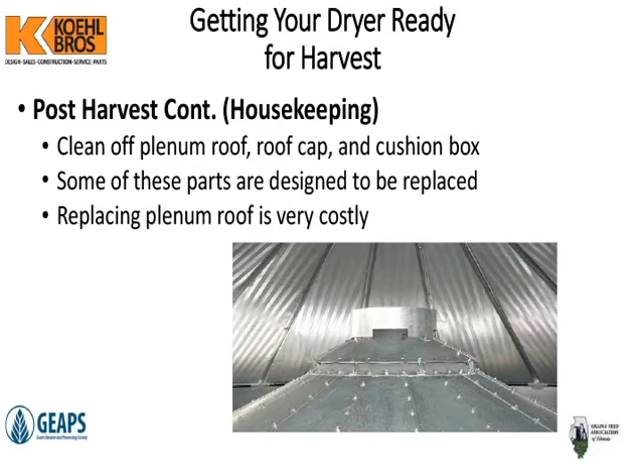Other items of cleaning, just basic housekeeping, right? The grain exchangers, they all have these clean outs on them. Some dryers have them on the inside. It's very important to get those clean. That's another not so fun one. You got to get a stick in there, a screwdriver, a punch or something and poke around. It can be time consuming. Nobody likes to do it, but it's very important.

Right here is our divider hopper. I'm sure anybody here who owns a tower dryer has been warned that is the most common place for a grain fire. Dust builds up right here. It's exactly the floor where the heating section and the cooling section separate. We get a lot of fines build up there, especially over the year. It gets harder. We go and fire that dryer up. It gets hot. It catches on fire because it's not going to meter. It's not going to continually move. It's just going to stay there and catch on fire.

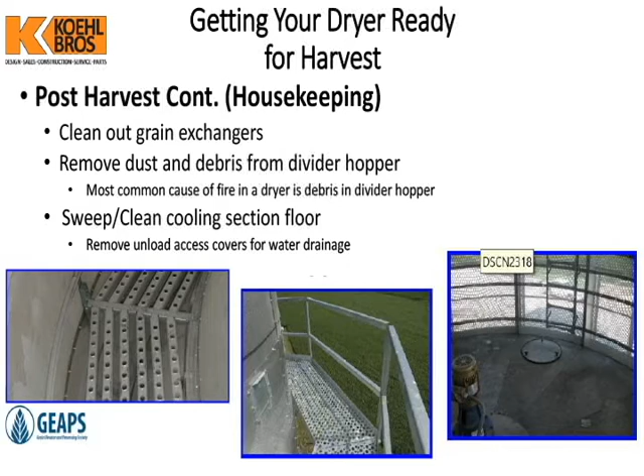Obviously, right here in the cooling section, throughout the year when there's not grain on it, we get water that comes in there. It sits on top of it. Again, that is a stainless steel floor or galvanized in some models, but it still will deteriorate. It still will rust. If you move these access covers, different models have them in different places, that'll allow that grain or the water, moisture, fines, whatever else to flow down into the unload floor where we can get it cleaned out.

The burner, we all have had to drill a burner at some time depending on what model dryer you've had. I know everybody knows it's a pain in the butt. We hire seasonal guys to do it. It's the least favorite thing my guys do. So what we can do there at the end of the year, let's make sure we get it just 100% clean. All of the fines, all the debris you can. I know when you're emptying the dryer, you get more fines, right? So you clean it off. I know throughout the year as more stuff falls through, maybe a distributor's leaking into the dryer a little bit, it's going to fill up again. That's where we're going to tarp it, keep it clean.

And then a lot of guys will spray their manifold cleaner. I've heard a guy say that he used Pam and it works great. I don't know, maybe your wife might get mad if you take Pam out of the house to take to the elevator, but that's what I've been told.

These holes on the older dryers are 5/64. We're going to talk a little bit about maintaining those burners here in a bit, but if you have a newer dryer, it's going to be aluminum alloy. You probably won't have to drill it. The older dryers, a 5/64, real long 6-inch bit will get it clean for you. That's again something you can do. If you got just a few holes at the end of harvest, maybe drill them out and then spray them down and cover the burner up.

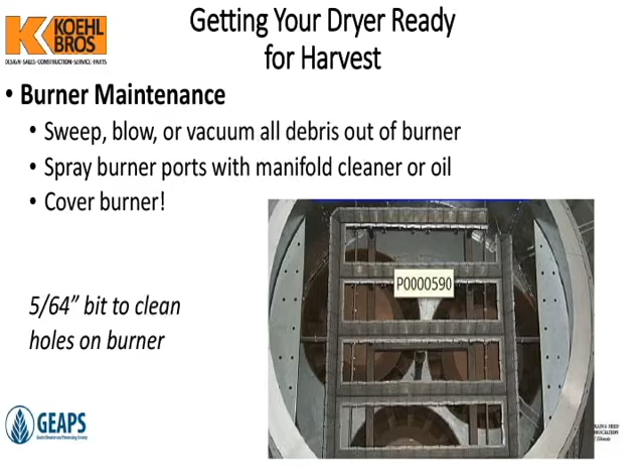After harvest, again, a few final things. We want to make sure, like I was saying, get all the water out. Water is the number one element that's going to kill your tower dryer. If it's not a fire, I actually think water is probably worse for it. So on the Zimmerman dryers or any Sukups or the flat bottom sweeps, the Brocks are similar too, we're going to have some clean outs on the bottom of the dryer. These ones are not for a fire. It's not so you can pull it if you have a column catch or a column get plugged. It's strictly to let the water out. That's why we have them there. That's what the manufacturer wants you to do. We want to keep the water off there.

If you have an older style hopper bottom or a Barrico or something of that nature, we want to pull that discharge out. A lot of guys, I've seen them put a plug on the back end, the tail end of a conveyor. Anything you can do to allow that moisture to go out. I've heard horror stories of guys firing up in the middle of winter. They said they ran the metering drum, it was fine. They ran the unload conveyor, and then they snapped the chain in half, right? Because there's 4 inches of water down in the base of the conveyor. It'll happen. It'll rip it all apart.

Final thing, gas train right here. There's a ball valve on there for a reason. It's probably not big enough. It'd be worth your while in the winter time, maybe every once in a while, poke a piece of welding rod or something of that nature up there. Make sure that water's coming down. The other item, which I don't think you can see here, but you got a 3/8 copper tube that goes up to the burner as well. It's a pilot. Doesn't matter how good you have the burner covered, you're still going to get a little bit of moisture in there, whether it's condensation, etc. That's going to be able to come down into the gas train.

If it does get in your gas train, there's a little CV valve right here. We'll discuss that a little later on too, but you can have some real operational issues. If we get water in there and it freezes, we'll make a little ice. You'll tell me your dryer's not coming up to heat. I'll tell you that you broke your CV valve. You say I'm wrong, you had the drain open all year. Then we'll finally take it apart. There'll be a big ice, and a day's worth of downtime later, we'll put a new one on and go from there.

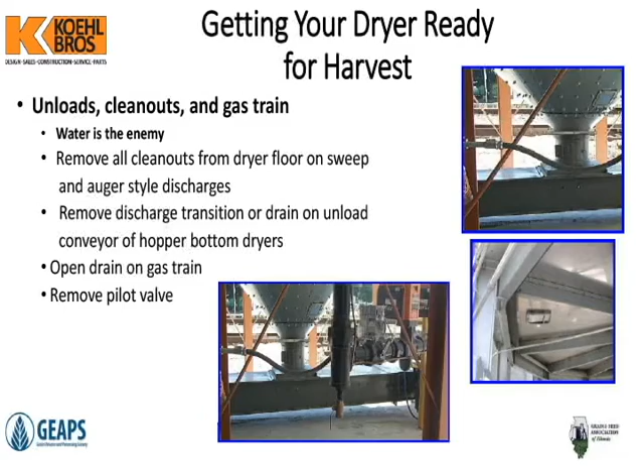So a recap on the end of season, right? We want to clean the plenum roof, make sure our grain exchangers are cleaned out, check the divider hopper just so no one at the beginning of next year fires it up without cleaning it, get our burner cleaned, covered, sprayed, and then make sure the cooling floor and the unload floor are ready. Make sure water can get out of there.

Okay, moving on to preventive maintenance. In tower dryers, it's really common, right? We all call it a pre-season. Everybody's got their pre-season guy. There's companies that do nothing but pre-seasons all year long. There's guys that go state to state and follow the harvest. They do pre-seasons. The main idea of a pre-season is to pinpoint any problems you're going to have, try to avoid downtime, do preventive maintenance like greasing, etc. Make sure the dryer is safe and operational, ready for harvest.

During this, we got a few things, right? There's big checklists. The manufacturer, when you get a GSI dryer, a Zimmerman dryer, a Sukup dryer, they'll have preventive maintenance items. You can go down, hit the checklist. A few things they're going to have you do: lubricate everything, check and fill all the gear cases, make sure the pipe train's in good working order, clean out the control panel, make sure your belts and motor sheaves are all good, make sure the blowers start up, everything lights up. This is just something a service tech is going to do to make sure you guys are ready to go as soon as the trucks start rolling in. I'll get into all this in more detail in a minute.

Okay, our unloads and our metering. So there's several different kinds of unload devices just within the same model of dryers over vintages. Right here we've got the Zimmerman sweep. Sukup is very similar to that as well. It's a flat bottom dryer. It's going to go along with the UHMW paddles and knock the corn out. This is a metering drum on a GSI dryer. It's a hopper bottom. Again, just meters the corn out, it's a big cone.

So starting on the old Zimmerman dryers, which I don't have a picture of, if you have augers as your unloads, that's very common in Illinois. They sold a ton of them, being out of Litchfield at the beginning. You've got a gearbox on the outside of your dryer, you've got a gearbox on the inside of your dryer, then you've got another two-piece gearbox with the augers attached to it.

You want to make sure all those are full on oil. They've got vents. You want to make sure the vents are clean. Make sure all the oil's up to the check plugs. On the hopper bottoms here, there's a couple different varieties of these gearboxes. It's called a Sumitomo. Some of them are grease-filled, some of them are oil-filled.

If you've got issues with them leaking, more than likely somebody at some time drained them, put a grease zerk on them, and they filled them all the way up. You just want to make sure there's something in there. They're very slow revolutions, so they don't need oil necessarily. They could be grease-filled.

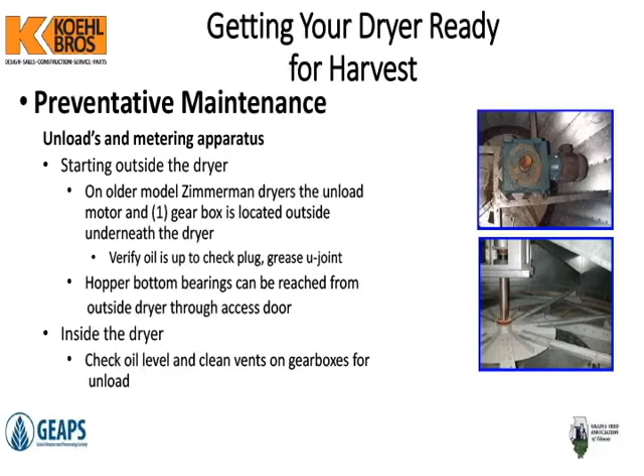Moving on to our blowers and our belts. So when we're greasing, we always get the question, right, do we grease our motors? That's a hit or miss topic right there. If you've never greased your motor before and you've got a dryer that's been around for 25 years with a 100 horsepower motor on it, you've never greased it, I wouldn't start now, right? You're going to pump grease into the windings, because the seals are worn or dried out. Wouldn't start now.

Manufacturer specification on the newer dryers say that they want 1 pump per 10 horsepower. Some of the blower motors do have a relief plug where you could take out the relief plug, pump grease until you see it, run the motor a little bit, check it again.

On the blowers on a tower dryer, they typically have a blower, not an axial fan, which means it's got its own separate set of bearings just for the blower. There's top and bottom. The bottom bearing, you guys are going to want to fill that up until you see grease relieve from the seal or somewhere of that nature, spinning the belts as you go, and then count your pumps. When you get to 50, depending on if the dryer's greased every year, depending on how many hours you run, that's typically around the numbers we're seeing. Hit your top zerk and do the exact same amount.

You want to check your blower belts. The belts should be even from sheave to blower. Make sure those are all even. Make sure the belts are tensioned. Manufacturer specification on the belts is you should be able to push them in 1 finger's width per belt, or not push it past the belt. You got to be careful on tower dryer blower belts and blowers. They use a V-groove belt, which is actually a little too robust for this application if you ask me.

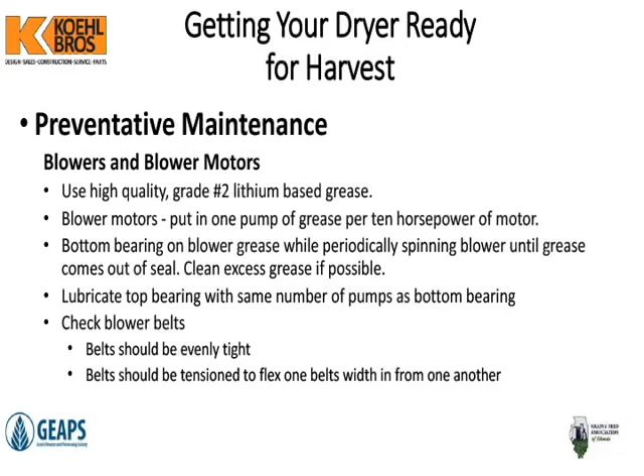Pipe train inspection, we talked a little bit about that. You want to look at your Maxon valves, CV valves, and ball valves. Make sure they're all moving freely. If there's rust and corrosion in there, you're going to feel resistance. You shouldn't have anything on the CV valves, the ball valves, or your Maxons. Maxon valves are, again, really, really expensive. They're made of cast. They will not give. If you get water in them and they freeze, they just crack. They explode. They will not stretch.

So that's something you want to check before harvest. Maxon valves are expensive due to that. Not everybody carries them. We do stock a few. I know GSI has some. I know you can get them places, but they come few and far between during harvest. So that's something you want to make sure is in order before you get going.

Make sure all your gauges are working on the dryers. If your gauges aren't working and you call and try to get somebody to troubleshoot you over the phone, the very first thing they're going to ask is what's the incoming pressure. If you can't tell them that, then they're not going to be able to help you out a whole lot.

There's drains and vents. There's vents on your regulator, there's vents on the pilot solenoid. You want to make sure those are clean. If there was construction going on at your site, another dryer was added, if there was construction going on down the road, you want to make sure those vents have been cleaned out. You want to make sure there's not a bunch of debris in your gas train. It can also cause you headaches and capacity issues down the road.

Control panels. There's companies around that will come and put an infrared camera on your control panel. You can do that. We've done it on a few facilities and found some pretty significant issues with old starters, one leg being hotter than the other. But the biggest way you can avoid that is just make sure all the connections are tight, make sure your starter's in good working order, make sure the heater is working.

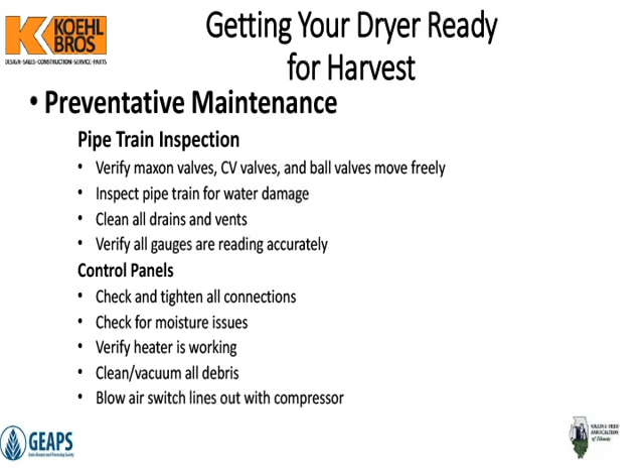We talked a little bit about the burner earlier, but I'm going to double back on that. Like I said, the old dryers had a 5/64 bit. It's about a 6-inch long bit. They're special. You can get them at Fastenal. You're not going to find it at your regular hardware store, though. When you're drilling those burners out, you want to make sure you're going all the way through. If you get a 1/2 inch in and it stops, it's probably an old bit in there. There's maybe some rust or corrosion. You're going to have to go all the way in, a couple inches in.

The new burners are aluminum alloy. Thank God Maxon started doing that so that we're not all sitting up there for a day or two drilling burners out. Those can still get clogged. The way a tower dryer works is it's high volume, low pressure. We can operate a tower dryer with as little as 8 pounds. A normal air compressor, when you're just blowing it out, you're blowing about 15 or 20. So it's not going to blow those holes clean.

Even on the aluminum alloy, if you get dust and debris in there, it's not going to blow them out. You're going to have to get up there with a big air compressor, poke them out with a T-handle or something like that, and get the holes clean. If you don't, and your dryer's coming up to temperature really slowly, that could be a pretty good indicator that you've got a burner that's clogged.

While you're up there, make sure your flame rod is not grounded. You can have all sorts of communication issues and interference if the spark plug or the flame rod are touching the side of the burner can instead of the porcelain touching it. And make sure the connections are good on there, and make sure that your spark plug wire and your flame rod wire are not touching each other, because you'll get interference that way as well.

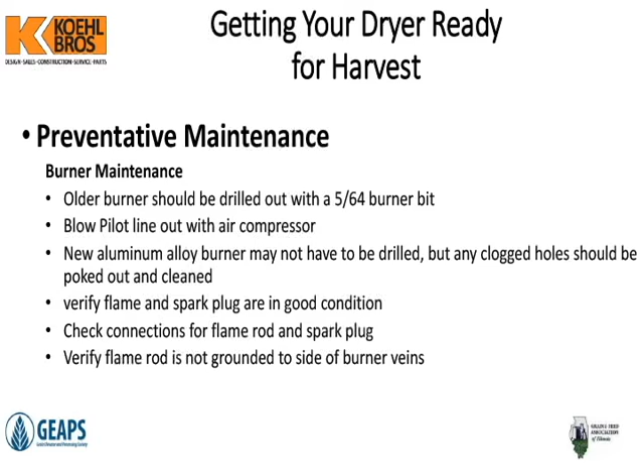Along with the preseason, typically you'll get a report. This is a report that we've done, actually on a tower dryer not too far down the road from here. We just identify a few issues, right? This close to harvest, we can't replace everything. We got patch sheets, unload motors, older. These are controls issues that we're not going to be able to take care of right now. That's why it's so important to follow up with the service provider or get these repairs on your list to take care of directly after harvest, just because there's only so much time.

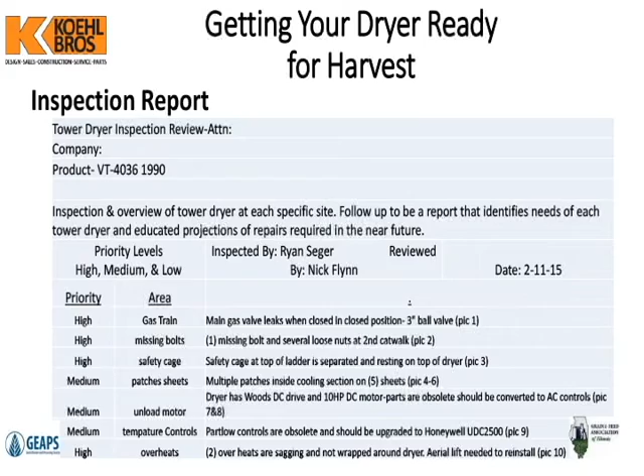Here in the report, follow up with some pictures. This is an old DC motor on a dryer that's around this area. If that dryer goes down in the middle of harvest, that DC motor, those parts are obsolete. They're looking at a 2-day conversion to get that changed out. It's time consuming. You can't afford to be down for 2 days, and I can't afford to get 2 service techs out there. So something to keep in mind.

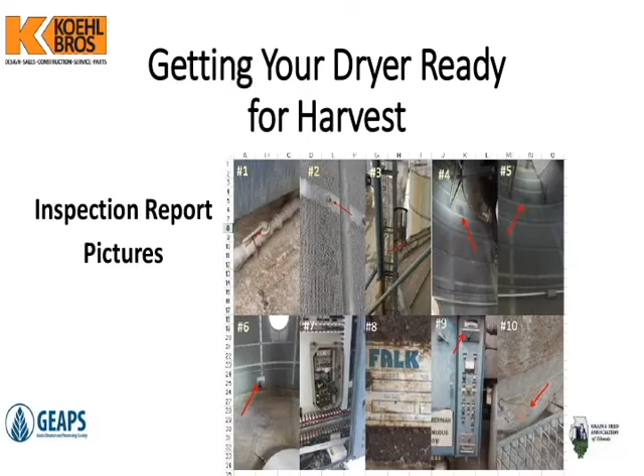Rounding back up, safety and success during harvest. Obviously, when you guys are getting in and out of the dryer, I know it's hectic during harvest. You want to make sure you're locking things out, tagging things out. You don't want the new guy there, your seasonal help, turning on the unload conveyor because another truck came in. He's going to fire up the dryer. You're in there cleaning it out. It can be very dangerous. Obviously, be very careful during harvest. I know things can get pushed back.

Inspect ladders and catwalks prior to harvest. During harvest, you don't want to be worrying about the ladder falling apart as you're running up there in the middle of the night to check out an overheat or something like that. So again, that's something to keep an eye on. Make the replacements you need to and the repairs in the off season.

Be careful entering and exiting the burner. Still to this day, anybody who's ever worked on a tower dryer knows that getting on and off the burner is not a fun thing. There are some alternatives now. There's a couple companies that have fall prevention systems that can be mounted over the burner. They're expensive, but they're a good thing because, like I said, it's very uncomfortable climbing over that.

I'm going to move on to a little bit more about what Bob was talking about, efficiency of drying and why this is important, right? This happens to be part of the preseason as you bring in your seasonal help, as you guys are looking at how you're going to run, looking at the types of grain coming in this year. There's a few things we want to look at. Housekeeping, we're going to look at training our operators and watchdog systems and capacity checks.

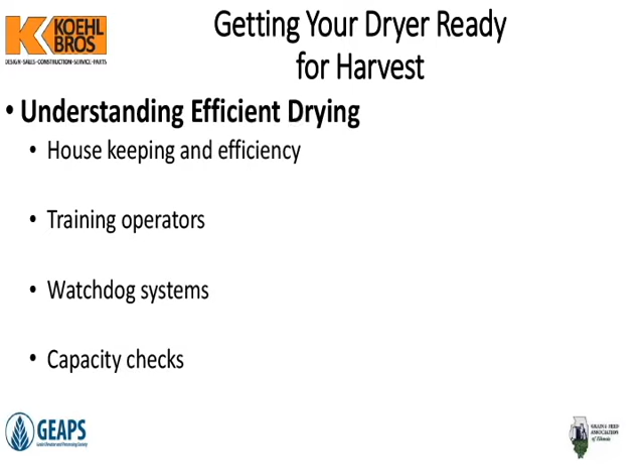Housekeeping and efficiency. I hear all the time when I show up and somebody's telling me we're not making capacity, the dryer's not doing what it's supposed to, and I say, well, the thing's covered in red dog from the outside, you can't clean it. They say, well, we can't afford to shut down. The office told us we can't shut down. Well, my answer to that is you can't afford not to.

Some models of dryers come with a static pressure gauge. It's a Magnehelic system. We've installed these aftermarket on a few tower dryers around the area. They seem to be, Darren and Matt can tell us, they're good. They give you some good information. What it allows us to see is whether the dryer is basically working too hard or not.

Again, most tower dryers have got a blower in there. The way those blowers work is they can only shove out as much air as they can suck in, or they can only suck in as much air as they can push out. If your dryer's covered with dust on the inside, the outside, however it is, and it can't breathe, those blowers are going to run slower and slower. They're not going to fight, they're not going to shove it out. They're just going to sit there and run slower and slower. You're going to waste electricity, waste time, and the dryer's not going to make capacity.

A static pressure gauge can be added aftermarket to tell you when you've hit the threshold of it's time to stop, shut down, clean it out, take an hour, and get back up and running. They're perforated for a reason. The air needs to go across the grain, especially in the heat section, but as well as in the cool section. If you're right by a truck dump, you need to keep an eye on it, right?

If we're not getting that grain cooled down, we're going to have issues with quality. If we're not cooling it down in a slow manner and we're throwing it in the bin still hot, or we're leaving it out, putting it in a pile hot, we're going to have stress cracking, etc. It's very important that that dryer is clean.

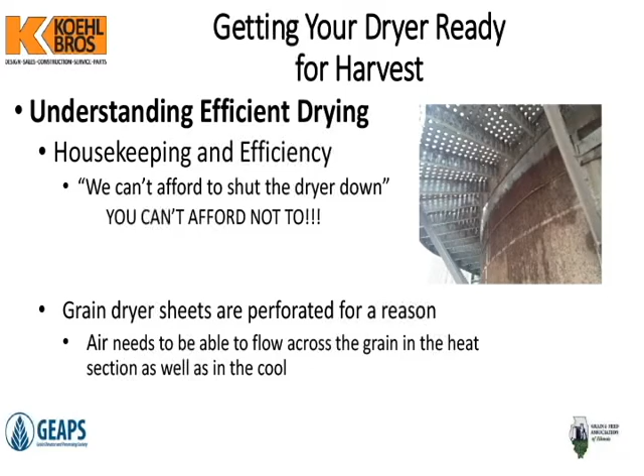Training our operators. I know everybody here has a guy in their neighborhood, especially in the country elevators, who just comes and dries for us every night during harvest. That's what he's done for the last 20 years. He says he's got it, he knows the dryer. Well, he may not understand the grain, right? We need to talk about every aspect of that dryer with this guy. We talk about the importance of running the dryer efficiently, cost effectiveness, etc.

A few things we don't talk about very often. I've got brand new dryers that we put out. I've got dryers that have been out for 30 years. Everybody tells me the same thing: we never mess with the louvers, we don't know what they're for. So we're going to get into that too. We need to keep the dryer full of grain, and we need to make sure our operators understand that we have the unload speed set correctly. Whoops, I guess not. Maybe I just need to talk about it.

Louvers. I don't know if I've got this later on my PowerPoint or not, but the louvers for the Sukup dryers, the Brock dryers, the Zimmermans, and the GSI dryers: 5 points or less of moisture is what the dryer is rated for. If you're taking anything 5 points or less, we want the louvers closed. What that's going to do is allow us to suck more air across the grain down in the cooling section. It will cool it down better. We'll have better quality grain.

If you're trying to do any more than 5 points of moisture, which I know in this area we do all year long, we want to open those louvers up. What that's going to do is make the actual grain a little hotter. It's going to be able to suck more air in through the windows, get it up to the heat section. It's not going to pull as much air across the dryer sheets down in the cooling section and cool our grain, so we're going to have hotter grain coming out.

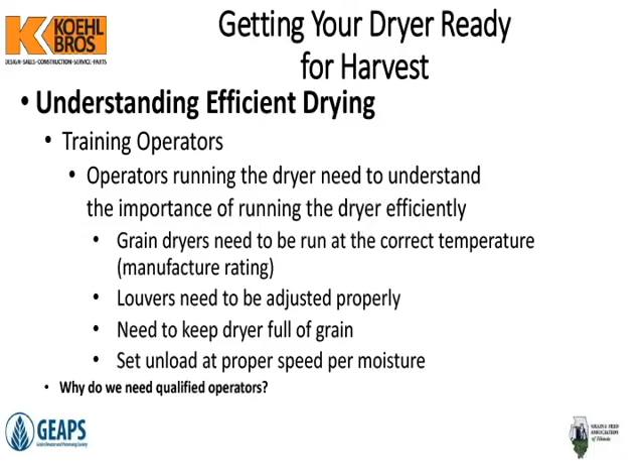You'll get more capacity, but you also have to deal with having hot grain come out. You may have to put it into a smaller bin with more air and then transfer it to another bin, or you just get to decide what's more important, quality or capacity. Again, we're going back to temperature, training your operators, etc.

For some reason, corn likes to dry at 200 degrees. There are several charts that show it's not even a linear equation. They're not parallel. Grain from 150 degrees to 160 degrees, there's a giant capacity jump. From 170, there's a big jump. 180, there's a big jump. And then 190 to 200 degrees, the amount of capacity increase is insane. Right here, from a cost standpoint and a capacity, if we're trying to come in at 20 and come out at 15% moisture, same thing over here. The only variable we changed was temperature.

If we're drying at 200 degrees, a 4,700 bushel per hour dryer will get about 4,700 bushels. If we're drying at 150 degrees, whether this is beans or whatever, we're going to lose capacity, about 1,000 bushels an hour. The other problem we're going to have here is we're going to start paying more per bushel to dry. It is harder to dry that grain.

If you get towards the end of the year, people say they don't want to run their unload fast because they think that's beating up the grain. You may not be able to afford to run your unload slower and turn your temperature down. You're wasting time, you're wasting fuel. Run the dryer at 200 degrees if you can afford the quality of grain. If you're cracking grain, obviously that's a different thing, but these dryers and grain are both set up to run at 200 degrees.

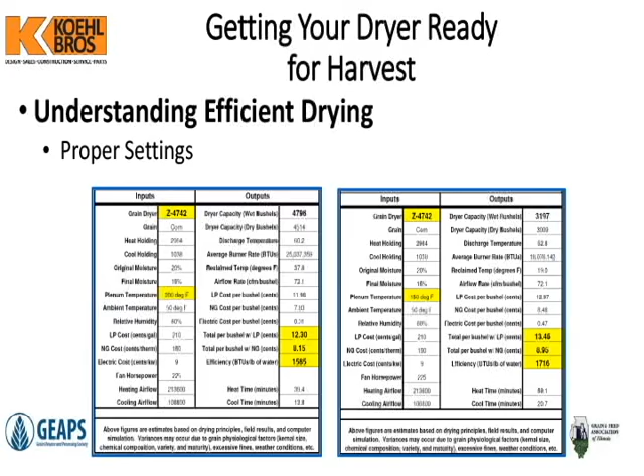Again, going back to training your operators here, there's something called the shrink factor. I think Bob touched on this a little bit too. But there's a formula here talking about 25% grain coming in, we're going to dry it down to 15. We have the same exact million bushels of grain. If we bring it in at 25% and then dry it down to 13 because the operator wasn't paying attention, because he didn't want to get hollered at for having it too wet because he wanted to make the train,

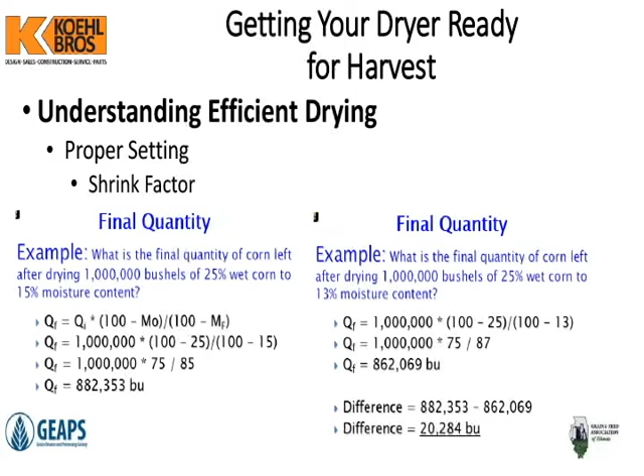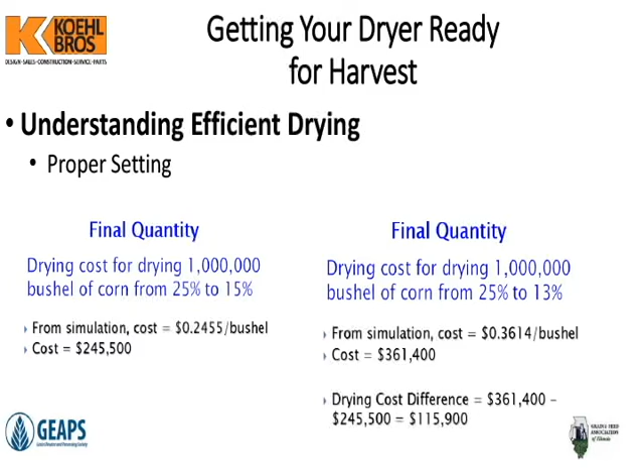The next thing, which is probably the most common issue with a dryer of any sort, is airflow, right? So I'm going to touch base on the blowers and the motors again. Direction has to be correct. I bet at least 2 or 3 times a year, a motor goes out, another company puts it in, they wire it up backwards, it runs halfway through the season, we get towards the end of the year, somebody tells me their dryer's not making capacity, we eventually get out there, they've had a blower running in the wrong direction for 2 months, right? That's a pretty big deal.

The way that can happen, and shouldn't, is right here, this air switch. The air switch isn't adjusted correctly. Those are the little copper tubes you guys see run up the side of the dryer. Portables have them. Every model dryer has some form of an air switch. If those air switches aren't set correctly, another blower will turn on the air switch saying, yeah, that motor's running, even though it's running the wrong direction, it's actually sucking instead of blowing air. It causes a lot of headaches.

The other thing is you have construction going on at your site. For some reason they changed some electrical wiring around, redid the main. All the motors could be going backwards, or only one of the motors could be going backwards. Again, it's something you might not know, something that's worth your time to check out real quick, especially if you think you have capacity issues.

Belt tightness, we talked a little bit about the V-belts, how they sit in the sheaves. We want to make sure that they're level with each other. From motor to motor, it's not as important, but from motor to blower, we want to make sure those are level. That'll keep from wearing out belts, as well as get our max RPMs.

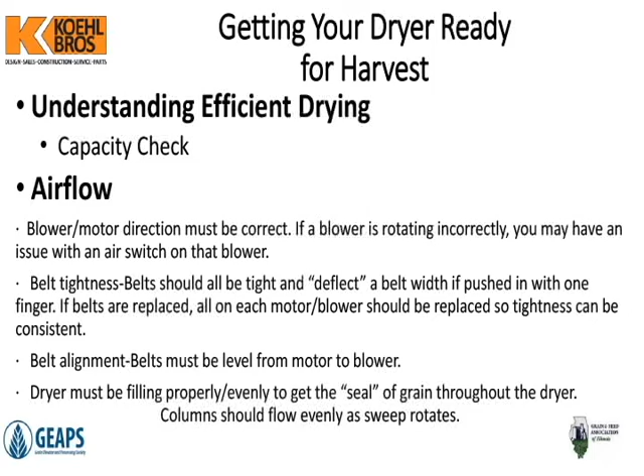Right now, there are a couple manufacturers working on some adjustable ones, so you don't have to get up there and bolt it down. They're also working on some adjustable indicators. But for now, it's going to take you, the operator, whoever your dryer operator is, you have to really watch that thing and get the max capacity out of your tower dryer.

I talked a little bit about the louver doors already, but less than 5 points of moisture, keep them closed. More than 5 points, open the louvers. Just understand the grain's going to come out hotter. It's not going to cool it as much. You got to be a little more careful watching your columns, etc.

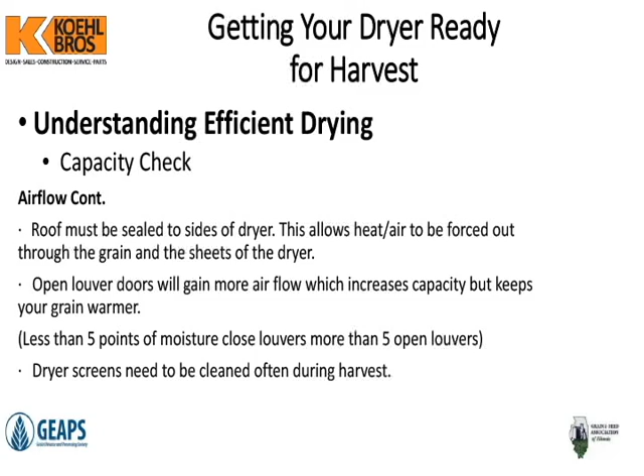Dryer screens need to be cleaned out often during harvest. Keep that dryer breathing. So again, these dryers are not magic. They're awesome, but they're not magic. They're rated at 5 points of moisture. That's the Sukup, the Brock's, the Zimmerman's. If you see that it says it's a 10,000 bushel an hour, that means you're only taking 5 points out. Anything more than that, it's not going to do it. 200 degrees at 5 points is how all these tower dryers are supposed to be rated. That's how the portables are typically marketed and advertised, but that's what they're going to do.

If for some reason you feel like you're not making capacity and you feel like the issue is heat, you want to make sure: are your burner ports open? When were the burners last drilled? And was the burner covered between use? Did you have water in the gas train? Are we constantly trying to fight moisture or water that's in that gas train? Is the gas not getting by appropriately? All those things. Is the modulating valve opening all the way?

During preseason, did somebody take it apart, not put it back together? Now we're starving for gas. It's running wide open all the time. Can't make temperature that way. That's something to look at. You want to make sure it's clear of obstructions. And again, if you had construction on your side, if you had construction down the road, if they did some gas line upgrades, you want to make sure those vents are clear, that there's nothing in the gas line.

Heat chamber temperature should be similar to the operating temperature. So if your display says 180 degrees, that's really what it should be up in the dryer. If it says 200, it should be 200, give or take. We have some probes. A lot of guys have an external temperature probe that they'll put up there and run down just to verify that their control's reading accurate.

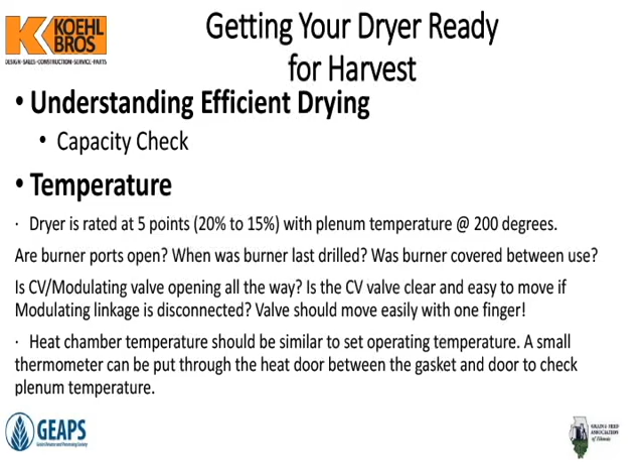The unload on a tower dryer, every model around this area, should run at about 1.5 times the max capacity of the dryer. That way, if you're drying 2% grain, or only taking 2 points out, you can really cook it along, or if you're just running grain through the dryer because that's the way your material handling is set up, it should be able to do 1.5 times the max capacity of the dryer. If you're at 50% on the newer tower dryers, that means you're at full capacity. I don't know why they didn't scale it to 100, but we have that issue a lot. 50 is 100. It's kind of messed up, but that's what it is.

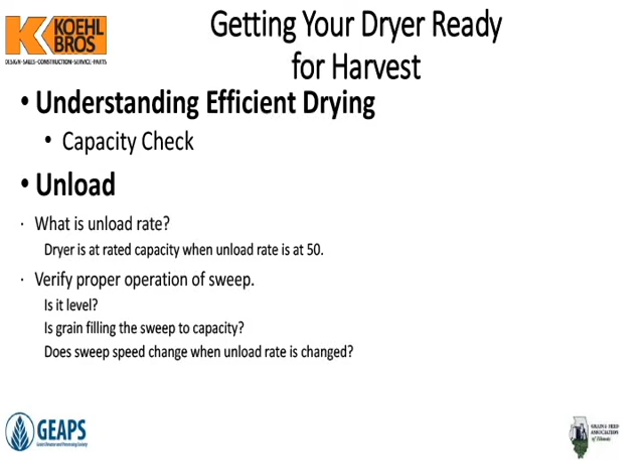We want to make sure the sweep's going the correct way. We want to make sure that the UHMW guides on our sweep are the right size. There's a few dryers that got shipped out that had the wrong size UHMW sweeps, and for a long time they couldn't make capacity unloading the dryer. It's something you can check out, and then make sure the sweep's running level, it's not higher on one side, the floor is not buckled, etc. Just make sure we're pulling grain as fast as we can. And that's all I got.

So, are there any questions? Pre-seasons or tower dryers or anything of that nature? That's it. Good enough for me.